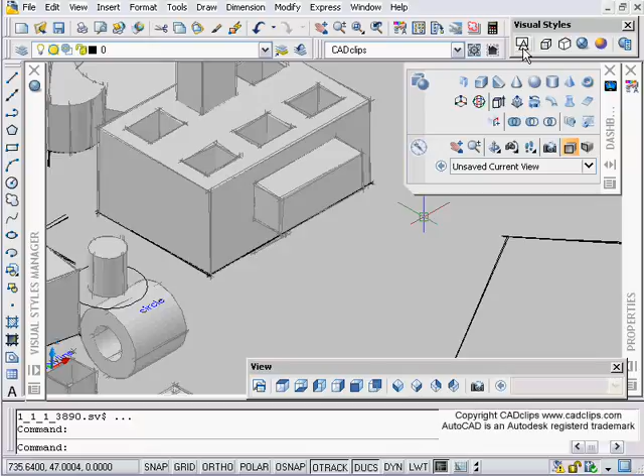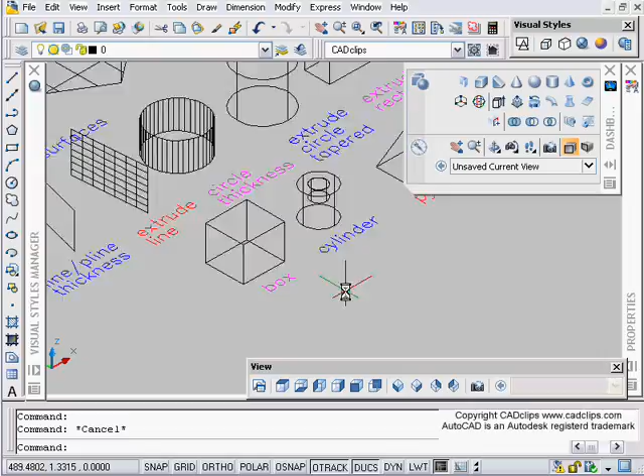The first thing I want to note is that it works a little differently depending on visual styles. If I go to 2D wireframe and click on a 3D solid, I'm going to get some grips, but my icon here isn't going to change. If I'm in one of the other views, like 3D wireframe, you'll notice that sometimes this icon changes when you click on a solid, sometimes it doesn't. Let's just click on a line - even a line works, so it doesn't even have to be a 3D object.

So the first thing I want to talk about with our 3D move, before we even push the button, is that if you're in 2D wireframe, you're not going to get this icon lighting up, which is what we're about to do. So any one of the 3D options - I can go into 3D hidden line.

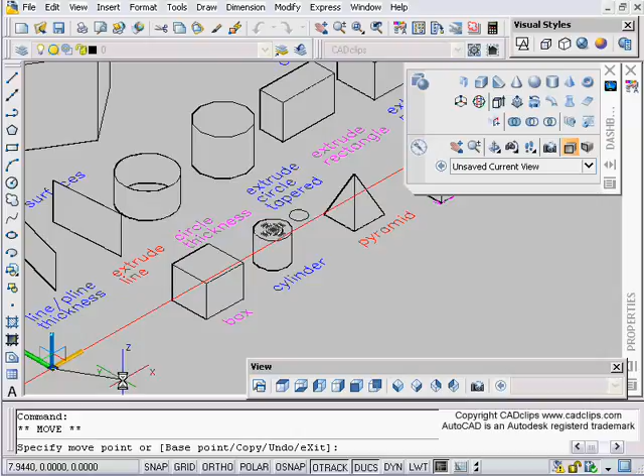If I click on an object and then I go over to my UCS icon over here, and I click on one of these axes, what it does is it constrains it to that axis - not even by starting a command. You click on an object, hover over that and pick. Now what happens is I'm moving that along that one axis. It just happens to be a circle - I wanted to get the big mass element. There we go, notice the axis.

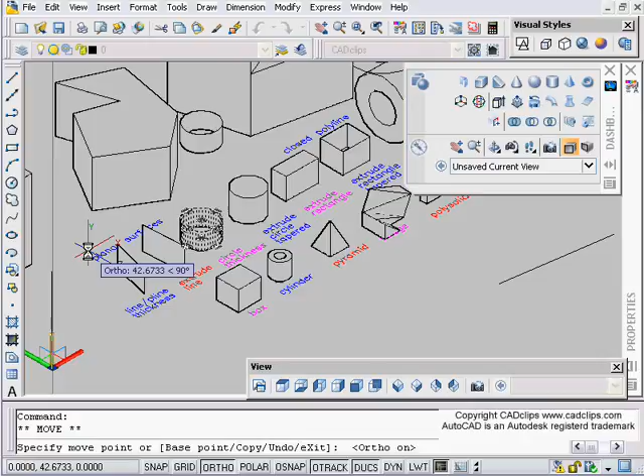Now I'm going to hover over this, click, and now I'm moving up, and if I just type a displacement like 10, it'll go up by 10 units in the air. Okay, undo that back. So without even doing the 3D move command, you can move in 3D by clicking on an object, hovering over here, picking, and then moving up and down - and you can also turn your ortho on and off. What I'm defining is the displacement distance. So that's the first and foremost thing - it does not work if you are in a 2D wireframe.

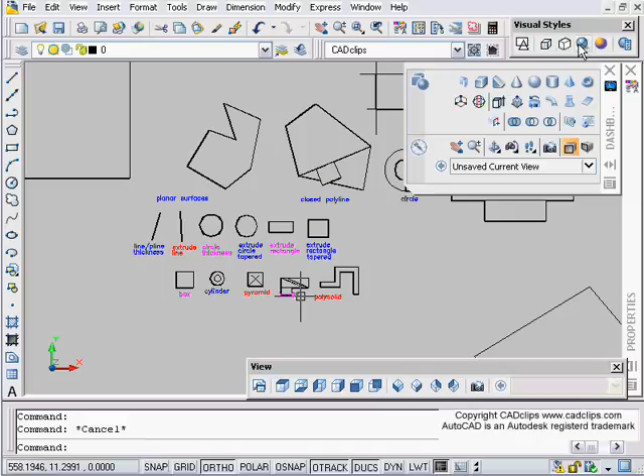What happens if we're in a top view and we're in 3D? If I click on this object, will I get the same effect with my icon down here? I won't - it's not highlighting, which means I need to be in a 3D view. Let's change myself to conceptual view and see if that makes a difference. No, so my viewpoint has to be a 3D viewpoint for this to work.

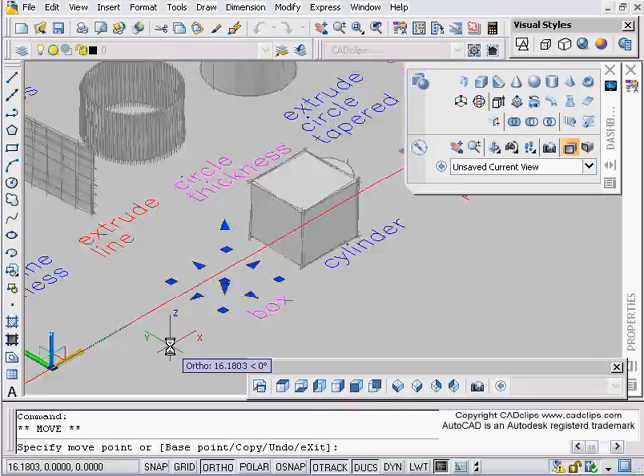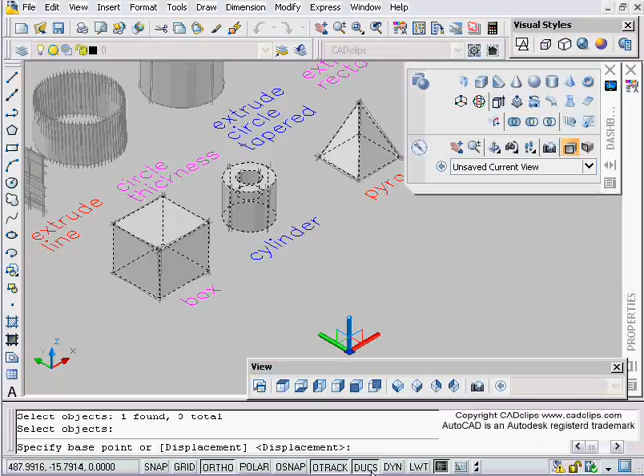Click on here, pick on an axis, pick on that axis, slide it along and then type in a number - that is really how the 3D move command works. Except with the 3D move command, we start our 3D move and can select any amount of objects we want, just like a regular move. We hit enter, and now on our crosshairs we get this lovely constraining set of axes, combined with our dynamic UCS. Watch what happens here.

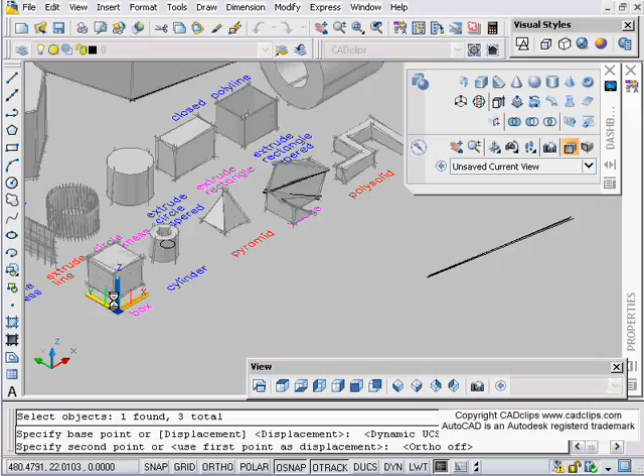If my dynamic UCS is off, I can turn my Osnap on and snap to a point, then move those objects along that point. This is down flat, so I'm just moving it - nothing exciting there. Now, if I hover over an axis, I can pick, and then move up and down, or I can type in a number.

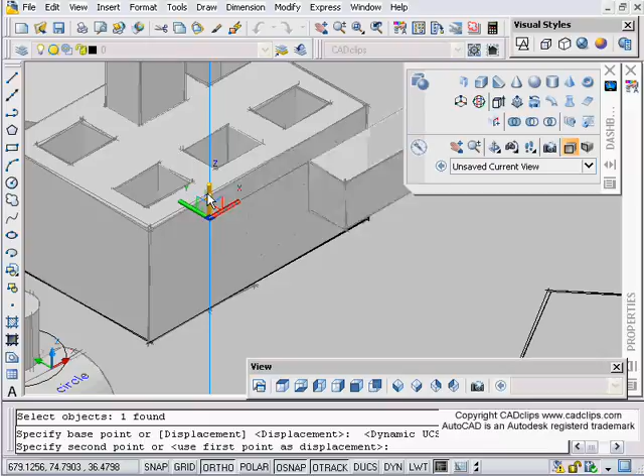Again, 3D move, pick the objects. Let's go over to here, take this guy. One thing I want to do - 3D move, pick this mass element here, hit enter. Now as I'm going along here, notice I undid my UCS. If I don't turn on my dynamic UCS, I can use Osnap to pick that point anywhere I want, and then hover over here and select the axis I want to constrain it to, and then type in a number. Very, very handy.

Now I can go back again, do my 3D move, pick on my object, hit enter. If my dynamic UCS is on, I can hover over objects and you'll see it picks up the plane those objects are drawn on. Let me take my object snap off while I'm doing this.

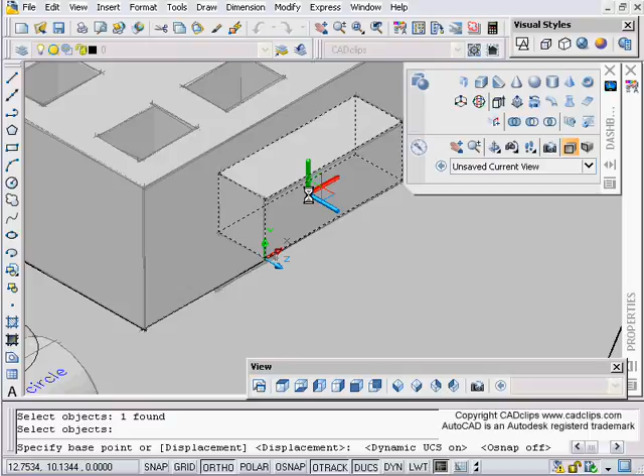Notice as I'm hovering over here, it's telling me this is going to be the plane I'm working on. Once you start to move, you can go in and pick the axis you want to move along, then type in a number, using our object snap and ortho as well.

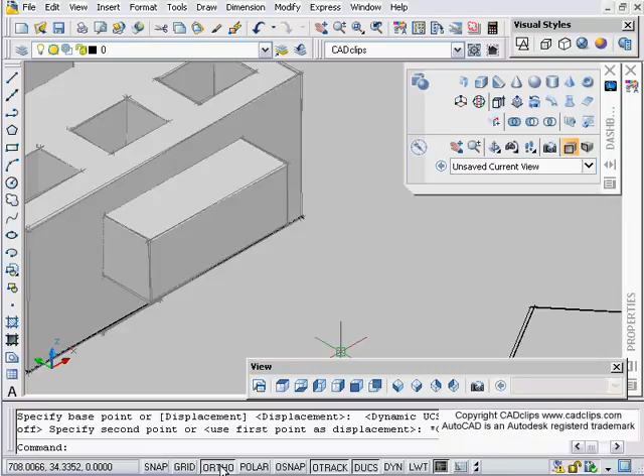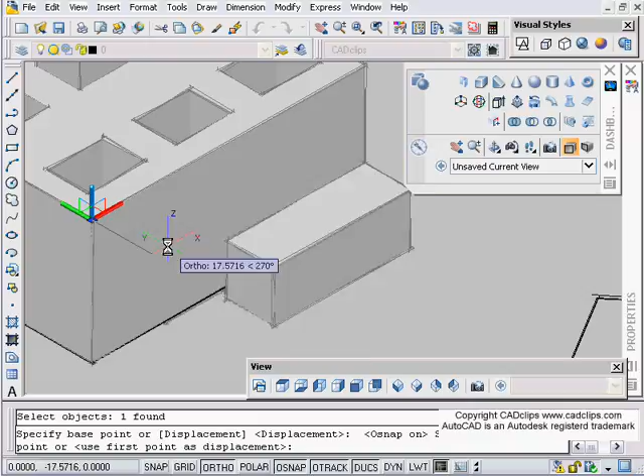So we're using a combination of our 3D move, selecting an object, enter, our dynamic UCS, and our ortho. We can also use our object snap to select a point we want to move along, then after we start to move, pick which axis to constrain the move to and type in a number.

The other thing I noticed while preparing for this lesson is a difference here. I wanted to show a little about the push-pull. Notice I had a separate object there. First I used my dynamic UCS, drew a rectangle, and then used my push-pull and pulled that out.

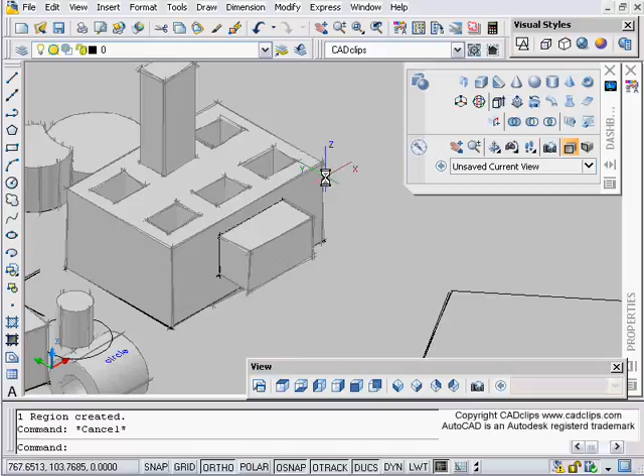One thing to note: when you do that push-pull, that becomes part of that one object. If I erase that or move this, it all gets moved as one object, because I did a push-pull off of that surface.

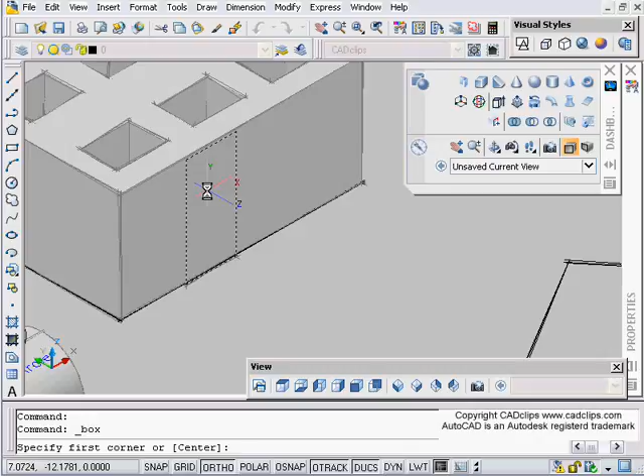As opposed to drawing a rectangle and push-pulling it, you can instead use the box command with your dynamic UCS, turning your ortho off and hovering over there. Let me try this again - box, hover over here, click.

I'm still getting the wrong surface. Here, there we go - click, and then pull. Okay, let me do that one more time for you.

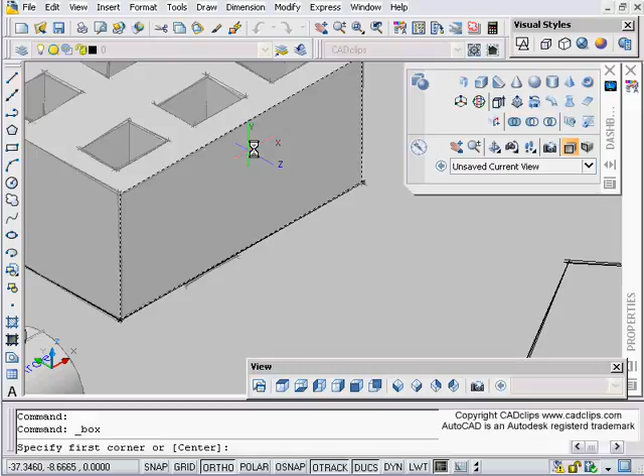Using my dynamic UCS and the box, hover over here, make sure you're getting on the right plane. You can see the outline, and sometimes it's easier to change your visual style. Pick, and then pull. When I go to do my 3D move, enter, pick - this is a separate object. So when you push-pull off of a surface, it doesn't create the new object as part of the original object of the surface it was dragged on.

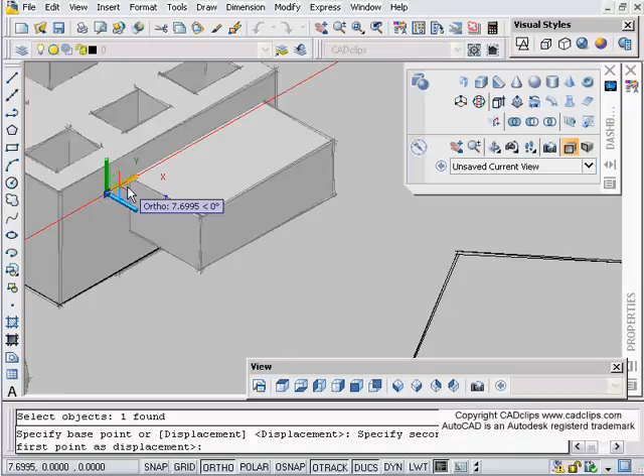So let's do a repeat of that exercise. Whenever we see these axes, before we finish our placement, we're free to pick an axis we want to drag along and then place that out.

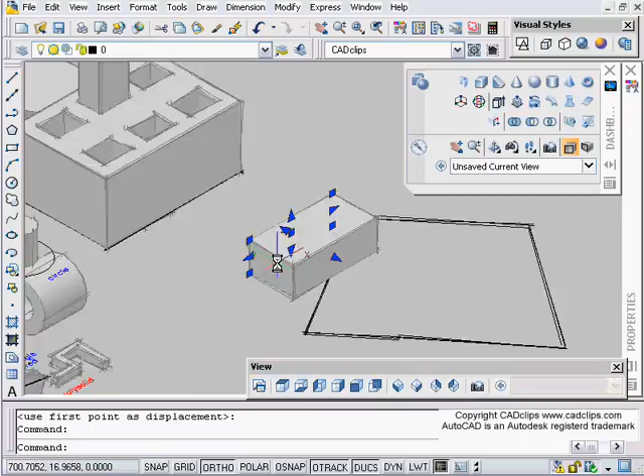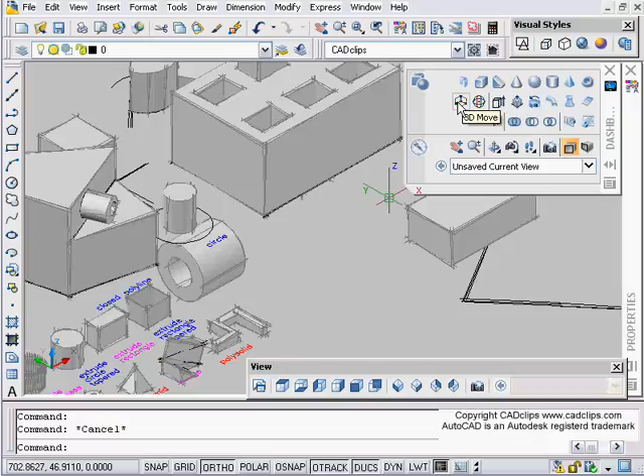So it's a lot easier to move things, especially in 3D, when we want to take objects and slide them along without using our X, Y, and Z point filters, which is what we used in the past. You can use object tracking to drop in nodes, use object snap, use polar, or use all of these, including DUCS, with our 3D move command.